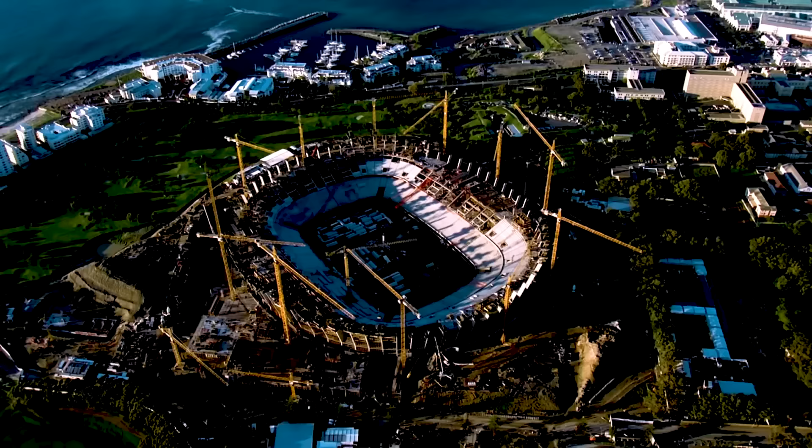The crane has been a tool of humanity for centuries. They're vital for the construction of everything from bridges spanning colossal rivers to skyscrapers that reach into the clouds. Modern structures would be impossible without them, and the same has applied throughout history.

Archaeological evidence suggests that the ancient Greeks invented cranes to help construct temples. It's believed a crane was used to build the Temple of Artemis in 530 BC. Obviously, they've evolved plenty since then.

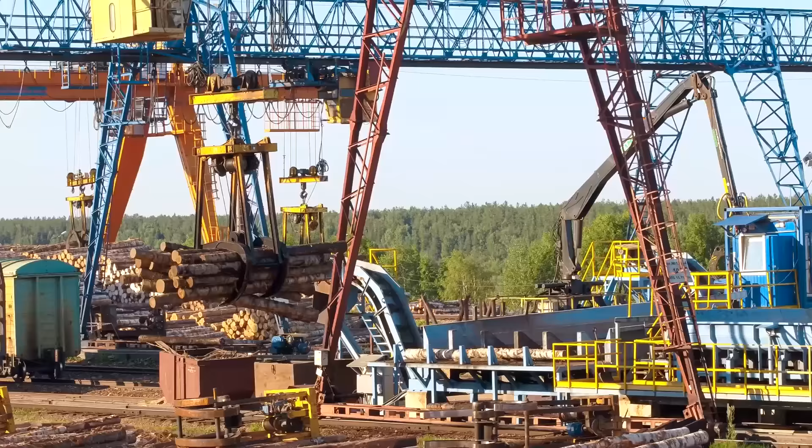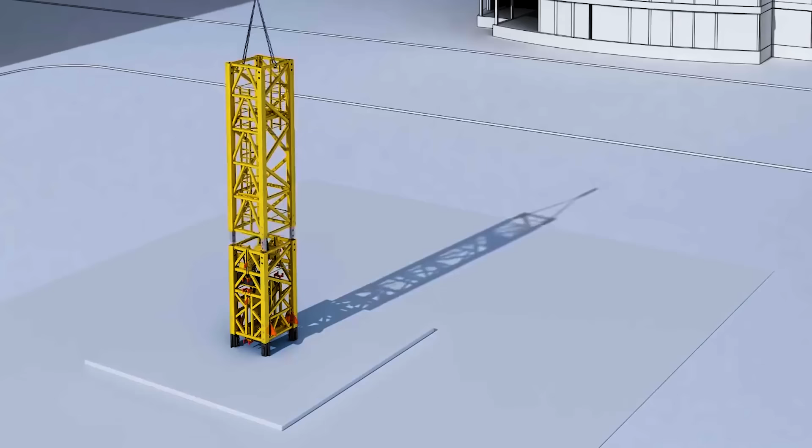However, prior to World War II, cranes were far less practical to use for a majority of projects. At the time, construction cranes were more akin to ship cranes and could only be used on large construction sites. They were fitted into concrete foundations, a process that normally took several days to complete, and were difficult to remove.

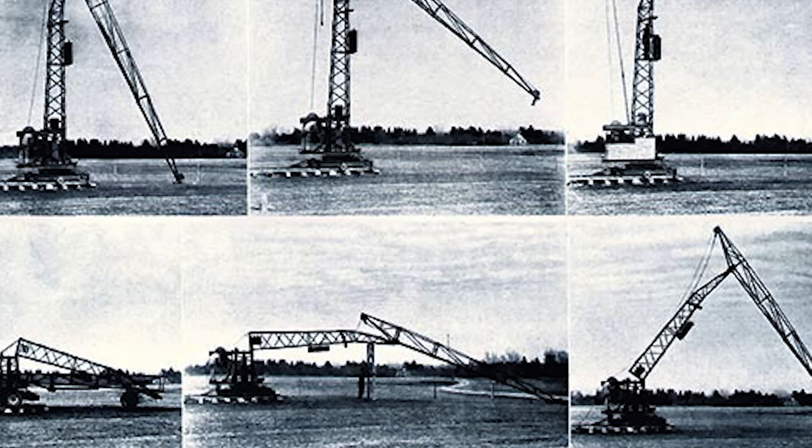With Germany in need of mass repair after the war, a master builder, Hans Liebherr, decided he needed to build a new type of crane that could be moved, used, and then easily moved again. In 1949, Liebherr invented the first mobile tower crane, the TK-10, which took 2 to 3 hours to assemble on the job site. This was a groundbreaking innovation in both the worlds of cranes and construction that not only accelerated the rebuilding of Germany, but laid the foundations for what is the Liebherr Group as it is known today.

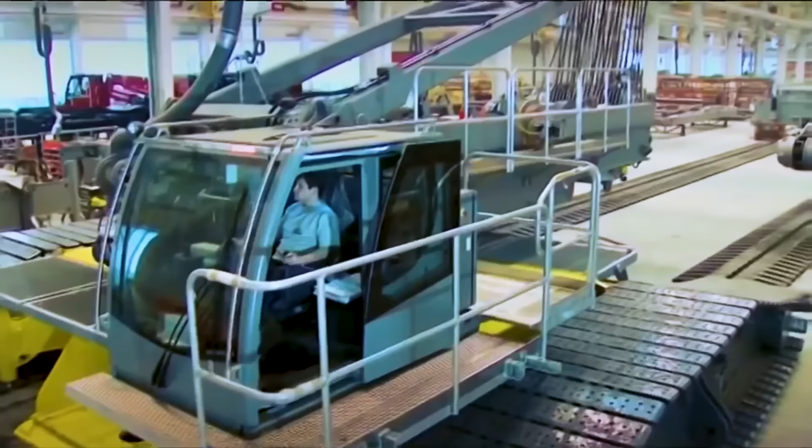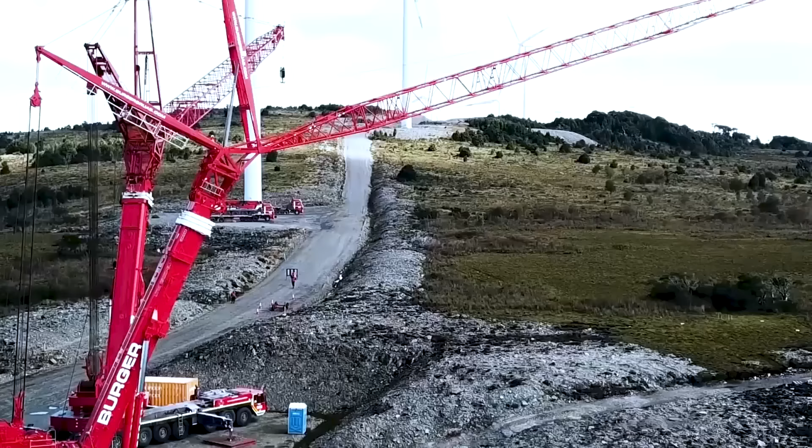We welcome you to this special documentary from Lord Gizmo, where today we'll cover the many impressive details of Liebherr's mobile cranes. Make sure to turn on captions if you want to see both metric and imperial units.

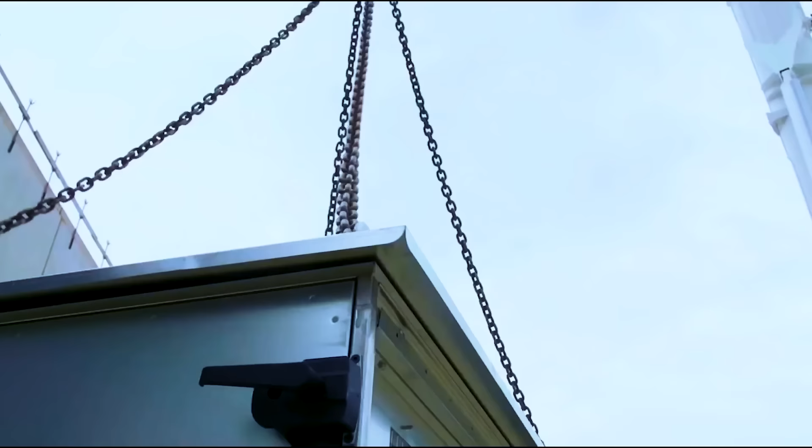The LTM 1300 is a 6-axle crane with a 78-meter telescopic boom that can be equipped with an extra lattice extension, providing a maximum hoist height of 188 meters. The crane can handle 300 tons of load within a radius of 136 meters. What sets this crane apart from traditional mobile cranes is its powertrain, which draws power from the same engine that is used to power the crane's boom.

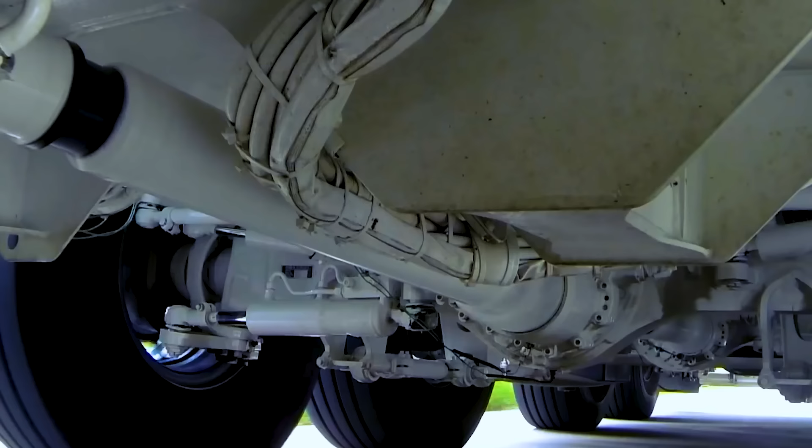Generally, a standard mobile crane is powered by 2 separate engines, one to propel the drivetrain and the other to operate the crane. However, mobile cranes from Liebherr come standard with one engine, used for both traveling and hoisting. The singular engine is connected with a distributor gearbox that runs the undercarriage when traveling and powers the pump drive when hoisting. This concept offers numerous benefits, including reduced vehicle weight and increased space in the superstructure.

It also improves balance, allowing for an increased load capacity or for a longer boom. Along with all that, having one less engine lowers overall cost, simplifies emissions systems compliance, and, most importantly, reduces maintenance complexity and costs.

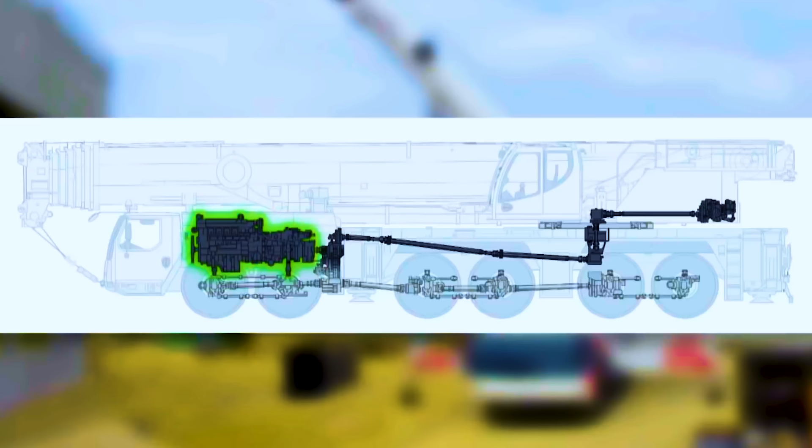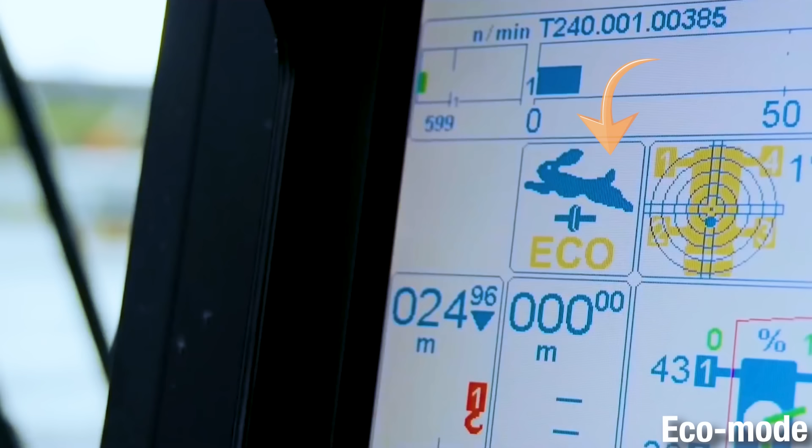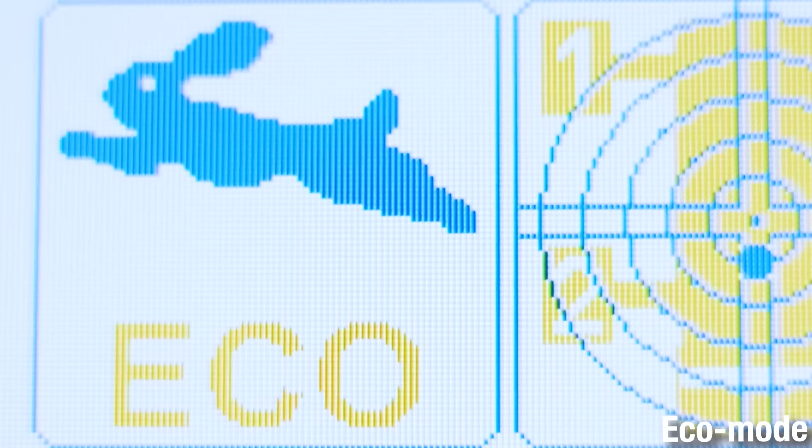To make their mobile cranes more efficient, modern Liebherr machines come with an eco mode. This system incorporates new technology that automatically senses when the crane is not in use and lowers fuel consumption. If the operator doesn't interact with the machine within a set time, the eco mode automatically initiates idle standby mode by disengaging the mechanical shaft from the pump drive.

The pump drive is automatically re-engaged whenever the operator decides to make an adjustment. The average crane idles more than 60% of the time during its operation, so this simple system is able to save a significant amount of fuel.

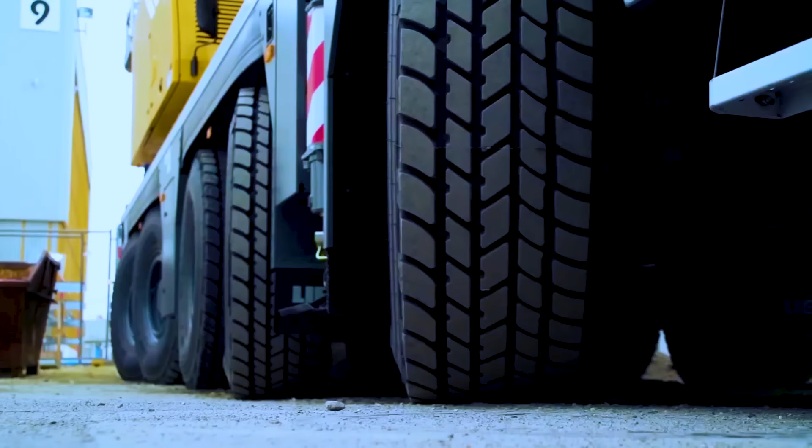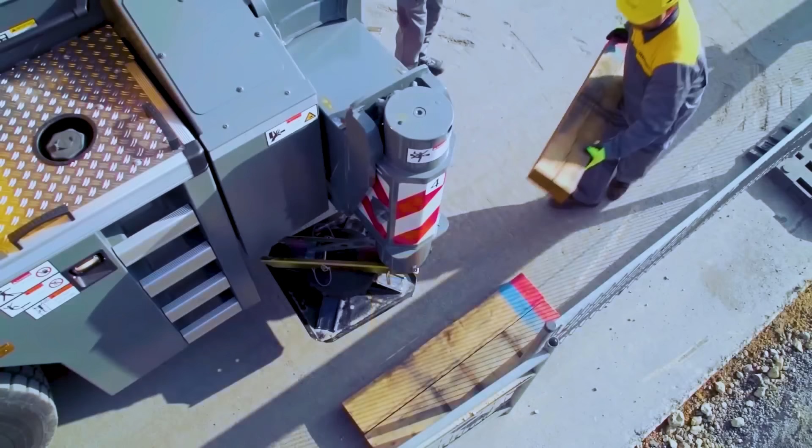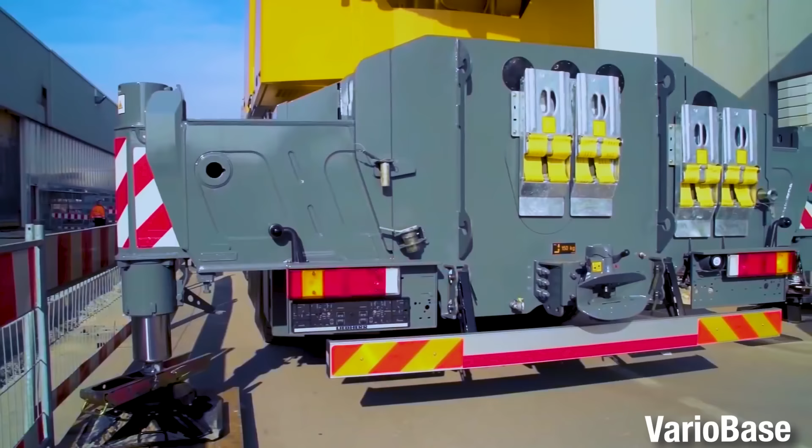If there is anything that is absolutely vital for any mobile crane, it is its stability. During crane operations, a mobile crane supports itself on an extendable steel base consisting of outriggers. The position of the outriggers determines how far the crane boom can be tilted. In tight spaces, however, the outriggers can't always be extended to their full length. Liebherr gets around this by using their VarioBase system, which allows the outriggers to be extended individually.

Liebherr demonstrated the benefits of VarioBase by using 2 mobile cranes, one with and one without their system. The provided constricted space only allowed for a support width of 4.4 meters, meaning each crane was only able to open its outriggers to half of their limit.

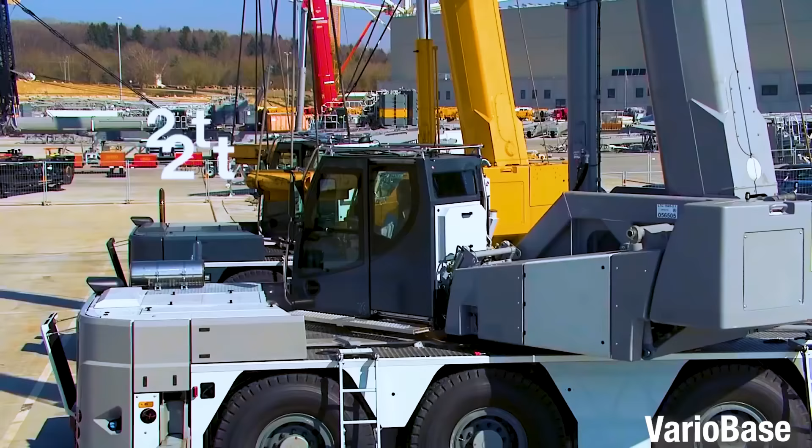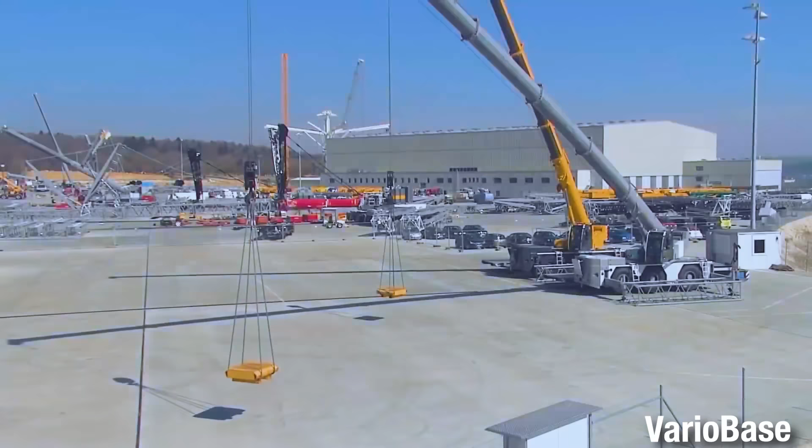However, the crane with VarioBase extended its outriggers by 0% on one side and 100% on the other. Consequently, it was able to attain a functional radius of 32 meters, 4.5 meters greater than with only 50% extension on all outriggers. In tight spaces, it's 12 meters longer than a standard crane.

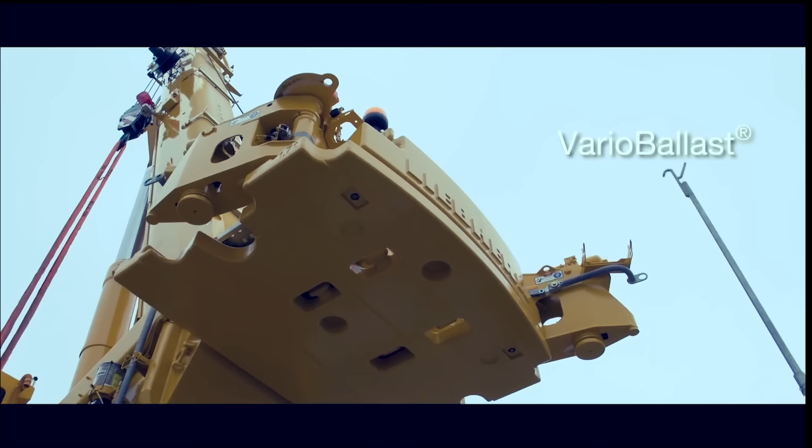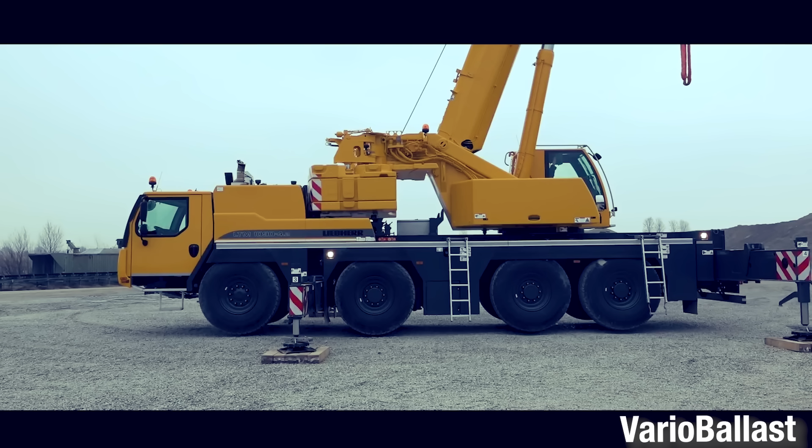There are other ways to improve the stability of a crane. Liebherr developed a system known as VarioBallast that, as the name would imply, shifts the ballast of a crane. Using a simple adjustment, the ballast radius can be changed quickly and easily, essentially moving it towards or away from the center of mass. In constricted working spaces, a narrow radius can prove to be most useful. On the other hand, a larger radius enables a crane to carry the same load to greater distances, or a heavier load outright.

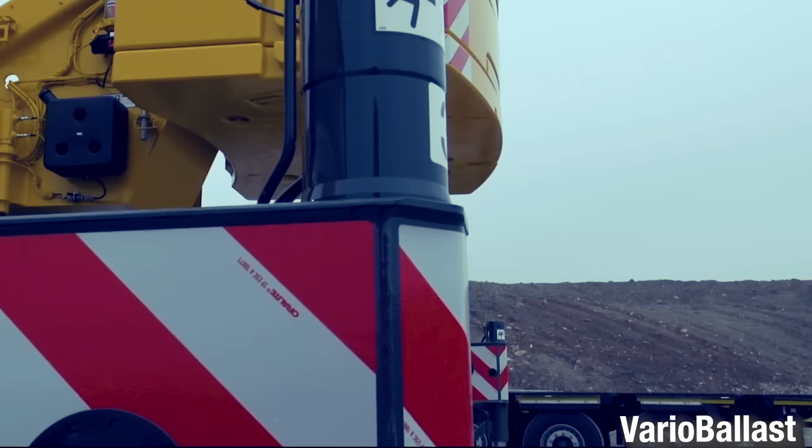The G-BKF is an armored mobile crane designed by Liebherr for the German army. It's certainly a great tool, but its use is not what we're focusing on. It features the same advanced steering system that Liebherr uses across all of their modern wheeled mobile cranes. It is designed to be used in 5 different modes. For instance, different modes can be selected for taking sharper turns, turning the front or back end, or moving diagonally without turning.

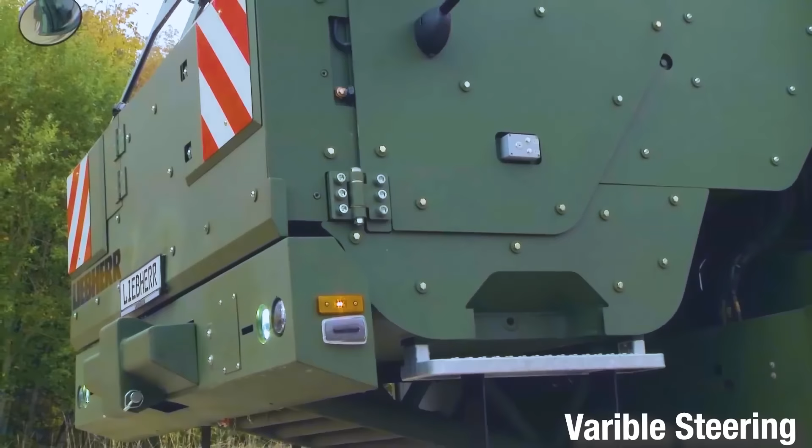Every wheel is equipped with adjustable height hydropneumatic suspension, which allows the operator to adjust for driving on slopes, reduced clearance height, or for increased ground clearance. The rear axles are actively steered by an electro-hydraulic system, while the front axles are steered mechanically directly from the steering wheel.

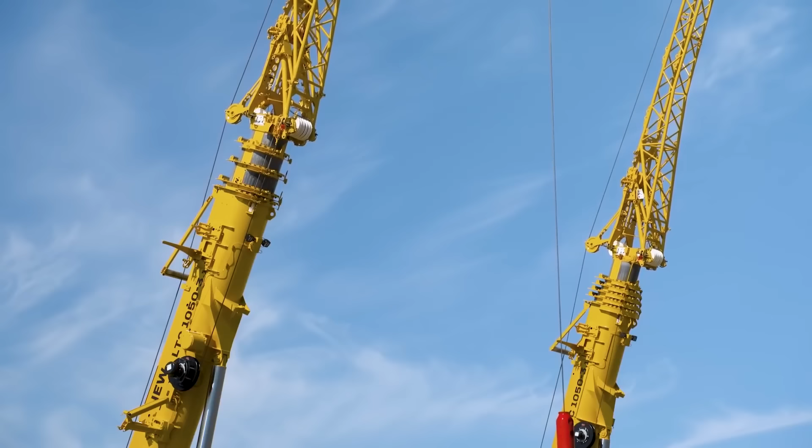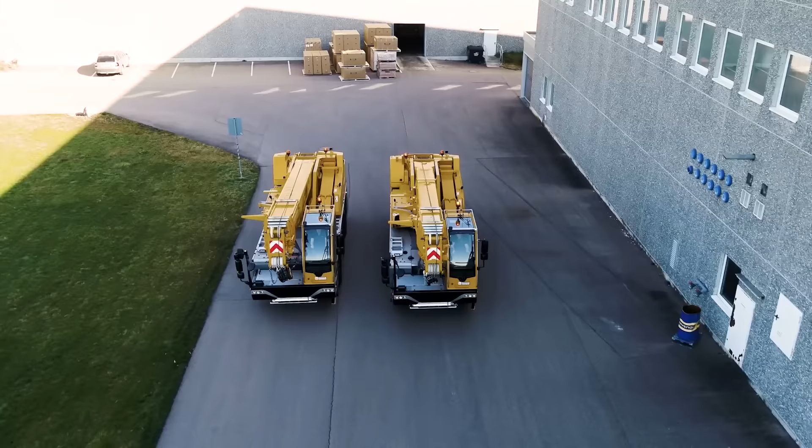The boom of any crane is obviously essential for it to perform its functions. Most mobile cranes come standard with a telescopic boom, which can be extended or retracted as needed. The boom's design determines its telescoping speed, load capacity, and lateral stability. Liebherr generally employs one of 2 basic types of boom for their mobile cranes. These are either a rope boom with a hydromechanical system or a telematic boom with a single-cylinder system.

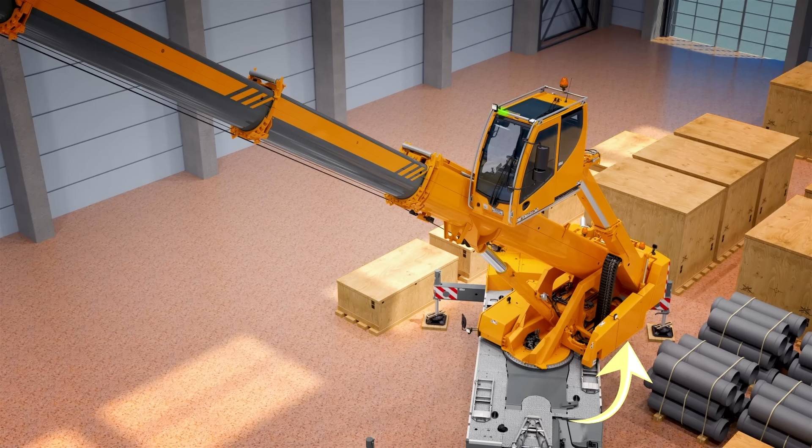A hydromechanical system is for any mobile crane whose telescopic boom consists of a pivot section and a maximum of 3 telescoping parts. The pivot section is the main frame of the boom that can be angled to change the height of the boom arm. The internal telescoping parts slide out of the pivot section using rope pull technology, which is based on a double-acting 2-stage hydraulic cylinder. Now, what does that actually mean?

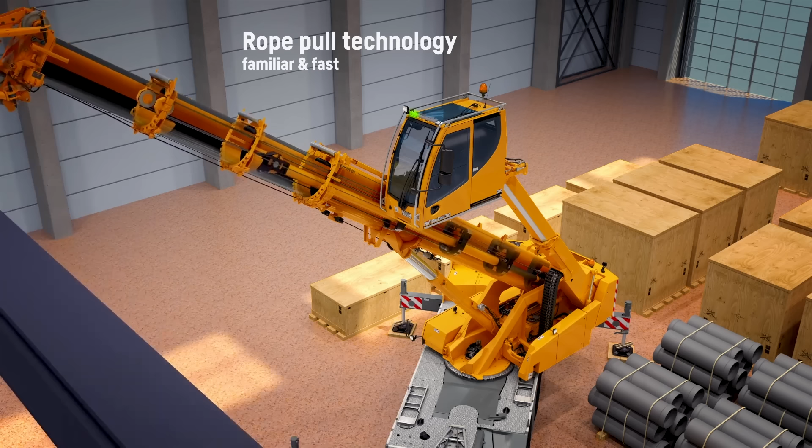Put very simply, a double-acting cylinder has a piston with 2-way hydraulic power so that it can be pushed or pulled. All of the telescopic sections move simultaneously. This enables the crane to extend and retract the telescoping parts faster than a single hydraulic cylinder. This boom type was designed for usage at low heights, such as between buildings.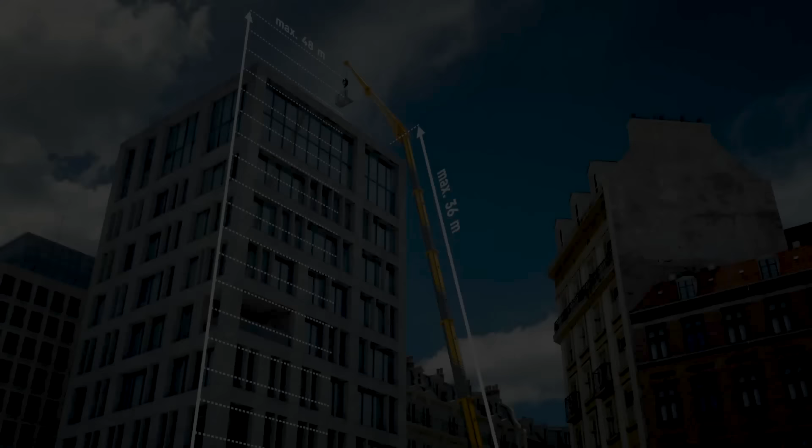A telematic boom, on the other hand, has an automated telescoping mechanism that relies solely on a single-cylinder extension system. It also includes an internal locking system, which locks each telescoping section one after the other. In other words, each section can only extend when the section before it reaches its maximum length. The telematic boom has been in use since the 1990s. This decades-long experience is why most mobile cranes are fitted with it, rather than other modern telescoping systems. This technology is still unbeatable when it comes to lifting and telescoping heavy loads.

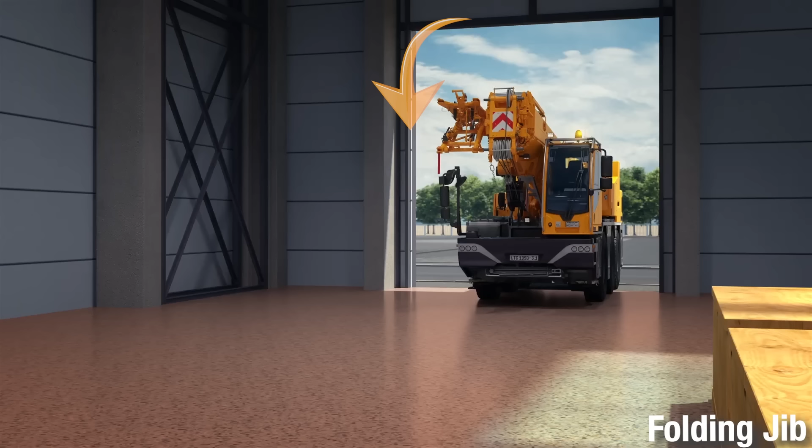Crane manufacturers also develop extensions for mobile cranes to meet job requirements, known as jibs. This includes the folding jib and the fixed jib. A folding jib is an extension that can be, as the name would imply, folded up and doesn't need to be taken off after use. On the other hand, a fixed jib is brought to the worksite separately and mounted thereafter. Such jib extensions provide exceptionally high hoist heights and load capacities when compared to folding jibs.

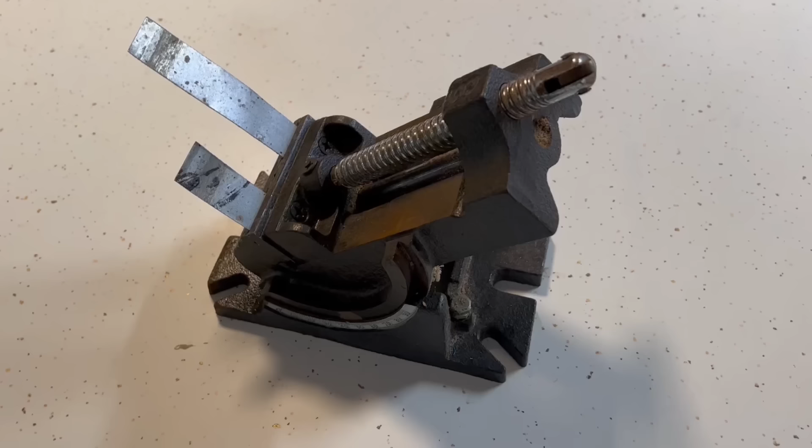The higher a boom goes, the harder it becomes to keep stable laterally. To put it simply, a heavy weight hanging from a long boom can cause the boom to bend. Imagine how a thin metal strip deforms when subjected to a force, and how a longer strip will visibly bend more than a shorter strip.

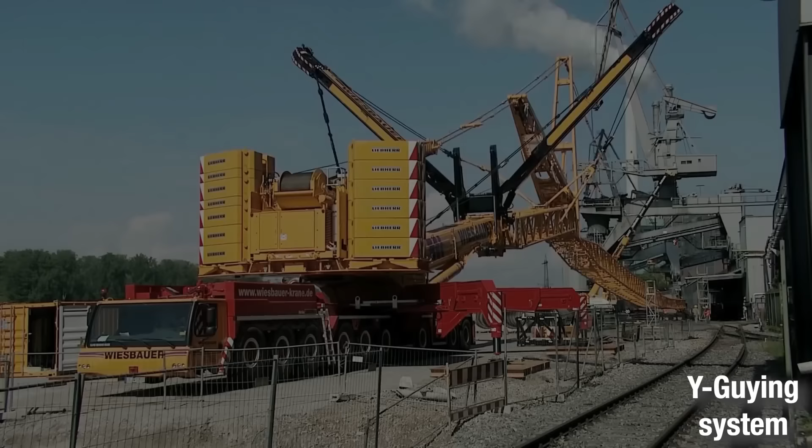A unique solution has been developed to counter this problem: the Y-guying system. Two ropes on both sides of the boom, pulling in tension to identical lengths. This keeps the boom straight and gives it a higher load capacity. It's definitely a complicated system though, which is why Liebherr only uses it with cranes that already have a load capacity of 350 tons or more.

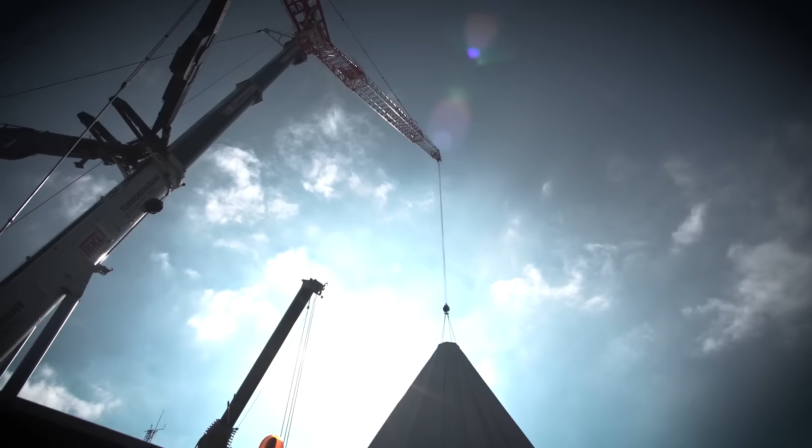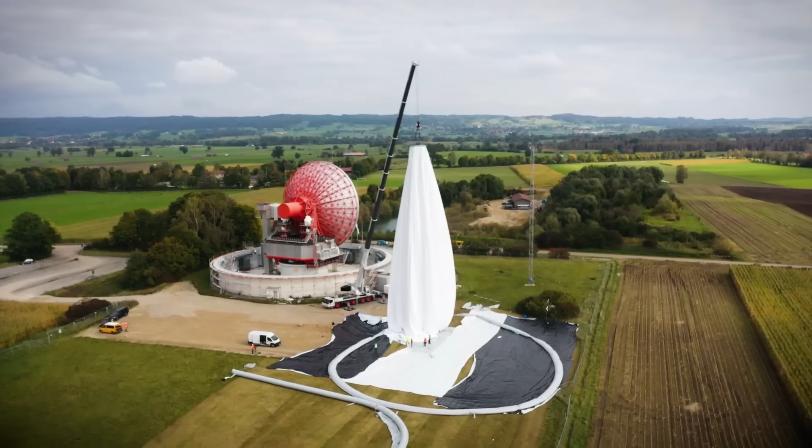One such crane is the LTM 1650, an 8-axle mobile crane with a 700-ton maximum load capacity. Using the Y-guying system, it was able to install a protective cover on the Raisting Radome, a satellite Earth station located in Bavaria. The total length of the crane's telescopic boom is 80 meters, on which a 56-meter luffing jib was installed. Strong blowing wind was the real challenge, as the cover was 50 meters in diameter, making it like a sail to the wind.

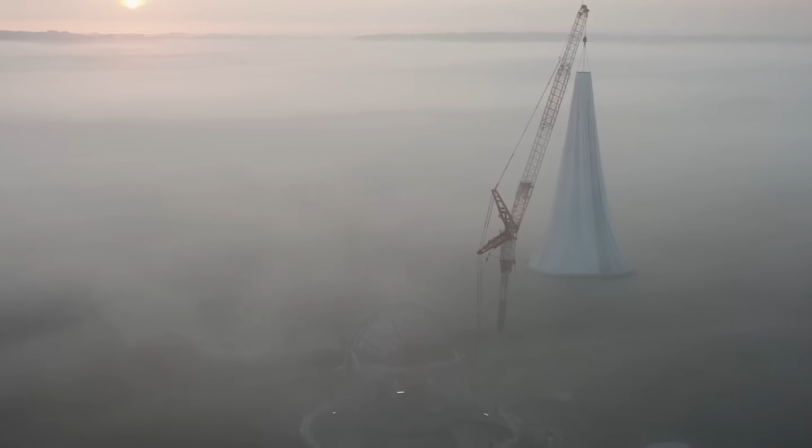The team calculated that the mobile crane would be able to draw over the cover with a wind speed of up to 1.5 meters per second. That's about 3.3 miles per hour. The Y-guying system kept this delivery firm, even when the load was 100 meters high from the ground. This Earth station, which once communicated with Apollo 11 to complete the moon mission, is now once again completely functional.

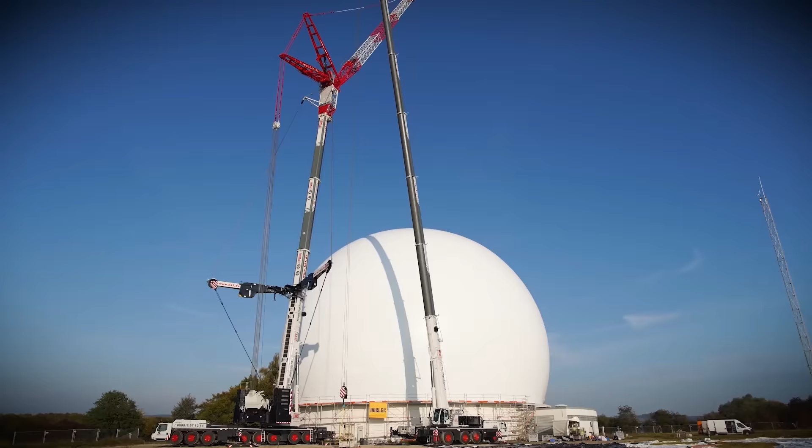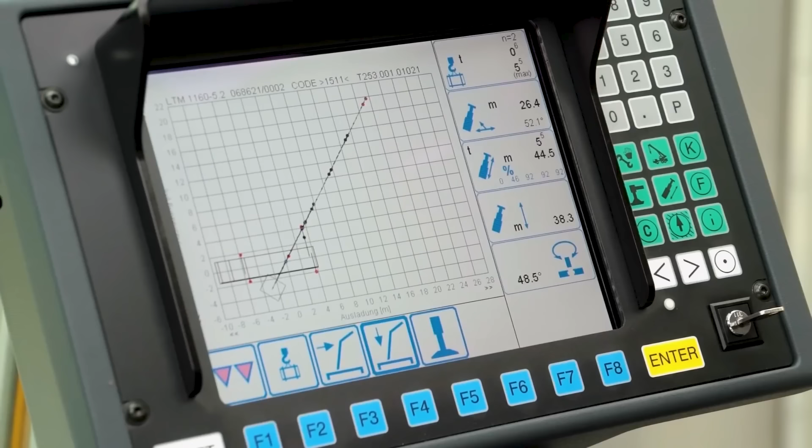The modern mobile crane comes standard with an intuitive control system. These use a variety of different sensors, alongside monitoring and control modules. One such example is Liebherr's LICCON system. Such a control system helps operators deploy the mobile crane more quickly. Using a Bluetooth remote control, operations setup can be completed quickly and safely. It employs advanced software in order to guide the operator in real time. A taste of the future, a VR-supported planner can be used in order to find issues and solutions in advance of the project.

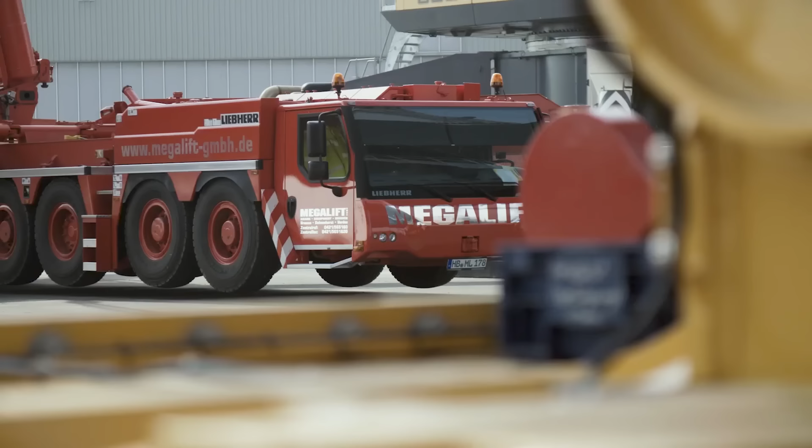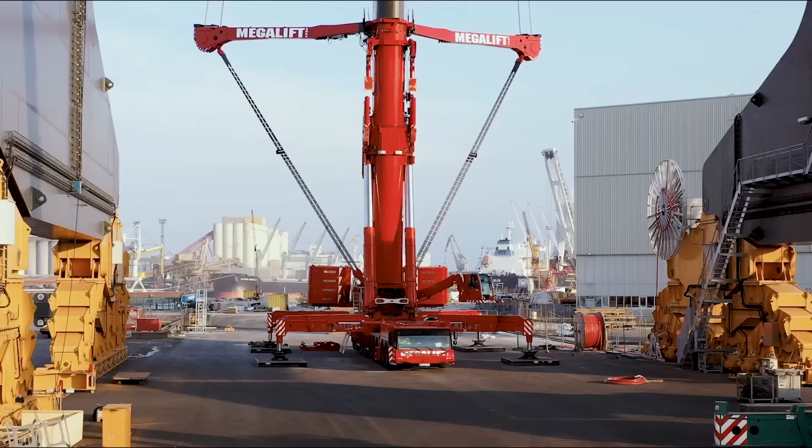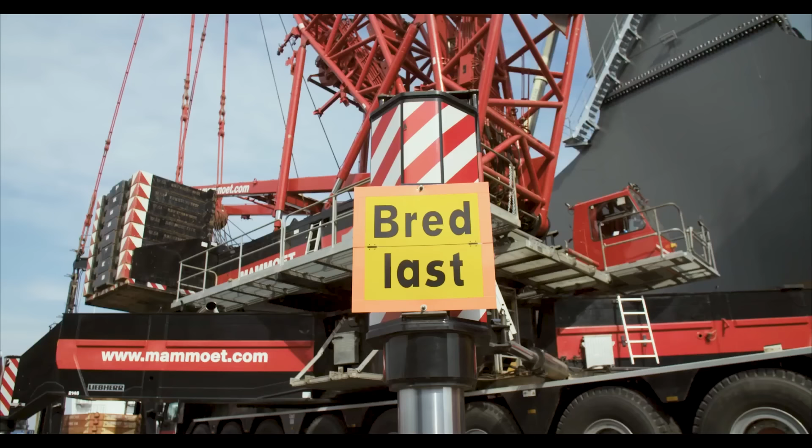The LTM 11200-9.1 is the largest mobile crane in its fleet. It comes standard with a 100-meter telescopic arm, offering a maximum load capacity of 1,200 tons and a maximum hoisting height of 188 meters. In addition to that, its boom can be extended using jib extensions or a Y-guying system, which is considered an ideal choice for the construction of wind towers. Here, this mighty machine, in collaboration with the impressive LG 1750, is raising a 160-ton top section for the mast.

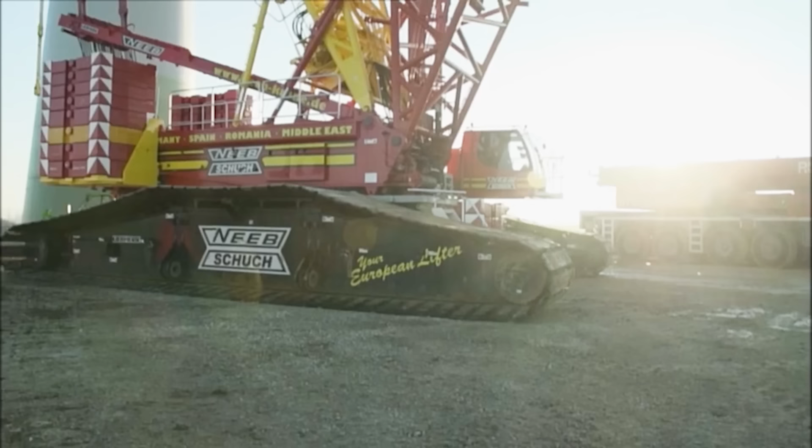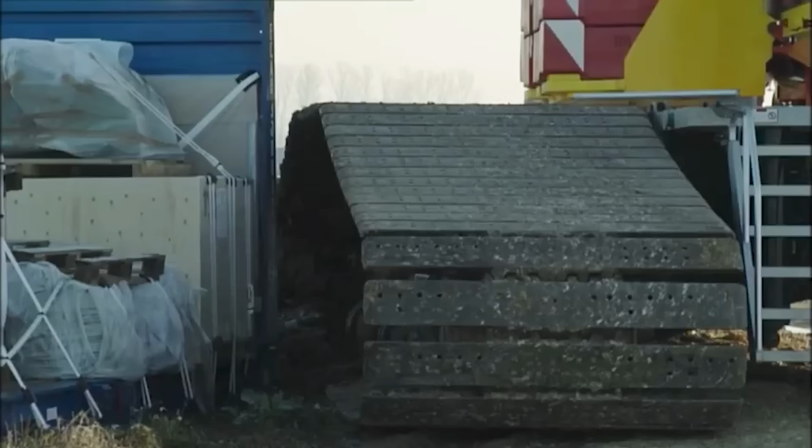Compared to a standard mobile crane, a crawler crane has the ability to move itself around the worksite, but it does so using a crawling undercarriage rather than wheels. This gives crawler cranes an advantage around the worksite by limiting the need for outriggers. Sometimes crawler cranes are steered while carrying a load. As compared to mobile cranes, a crawler crane can haul more loads and provides extra flexibility, but that doesn't mean this type of crane can smoothly deal with any job site situation.

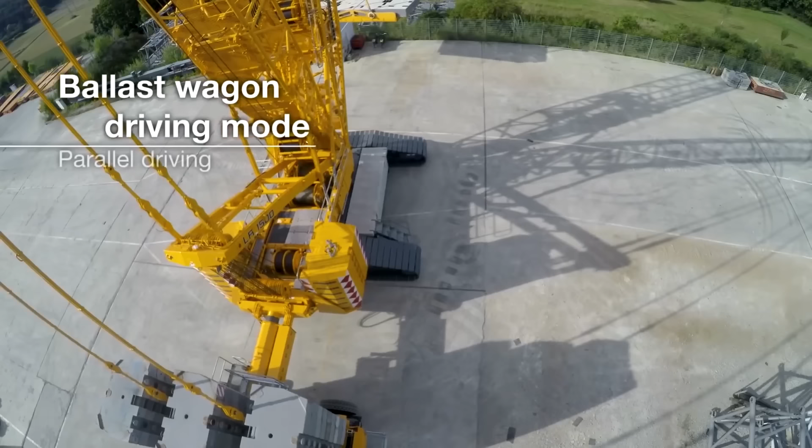For one, crawler cranes are unable to move along roads. Their tracks would cause damage to any road surface, particularly when turning. Thus, they generally have to be transported to a job site via trailer. Along with this, as with any machine, the working area under a crawler's track can only absorb a limited amount of pressure. Tracks are great for spreading out pressure. However, the ground around things like ledges or above underground pits can only take so much force. Exceeding this can cause subsidence, and as a result, the machine could overturn.

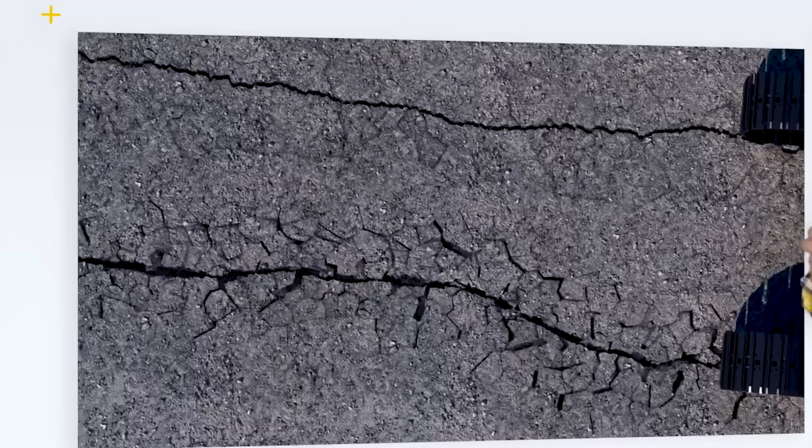In order to cope with this problem, a ground pressure visualization system is installed in crawler cranes. This system constantly measures the ground pressure and the exact position of all moving parts. On the control monitor, the machine's center of gravity and ground pressure are displayed so that the operator can avoid potentially hazardous situations.

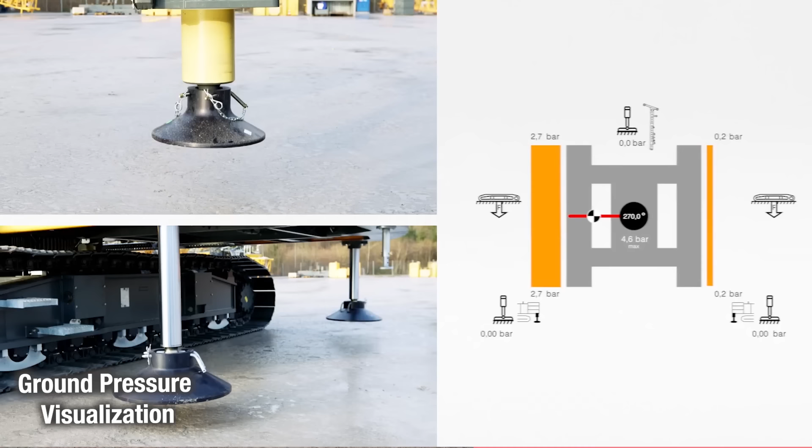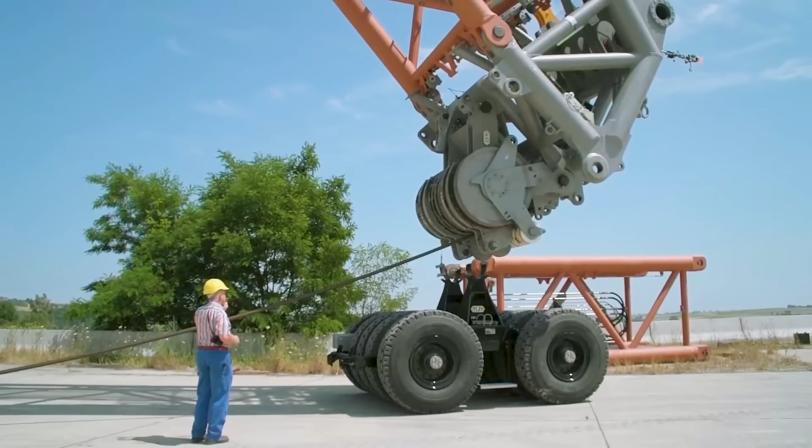Unlike mobile cranes with telescopic booms, a crawler crane is typically mounted with a luffing jib. It has a lattice jib that can be raised and lowered, a motion known as luffing, which offers greater adaptability and lifting capacity. Due to the reduced slewing radius, it is particularly useful for work in congested areas. The LR13000, with a 120-meter main boom and a 126-meter luffing jib, is the tallest crane in the world, offering an overall height of 246 meters.

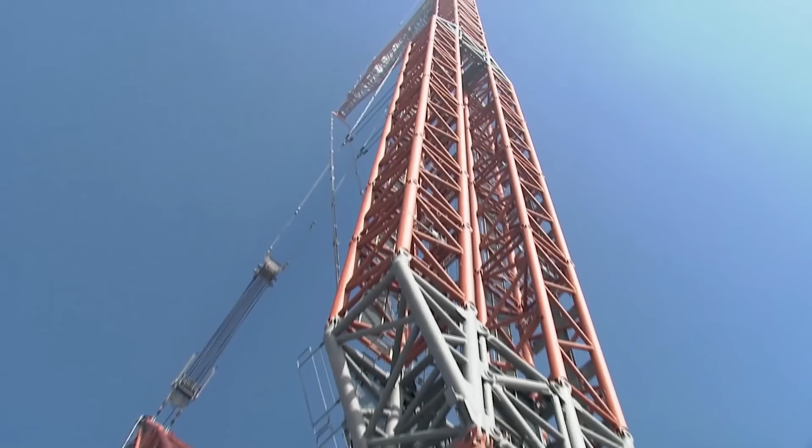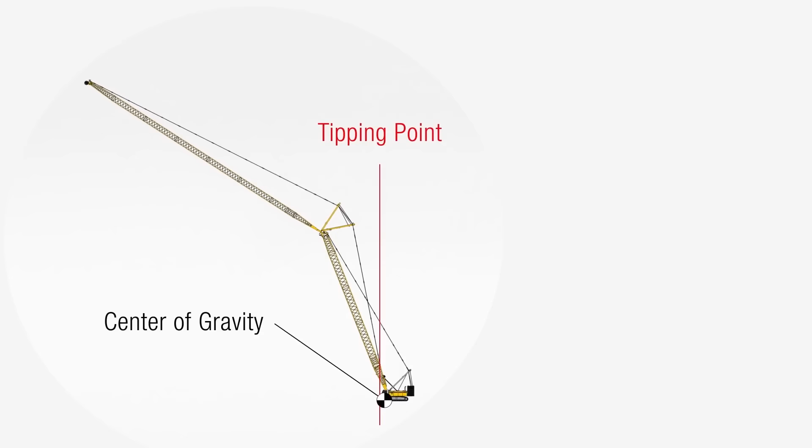Erecting such a long, heavy boom is a challenge in and of itself, and keeping it straight is yet another. The higher the boom stands, the harder it becomes to keep it upright, as the boom becomes exposed to increasingly stronger winds. This can lead to tipping, which is a problem that occurs when the crane's center of gravity is not above the tracks or outriggers. This is the reason wind sensors are mounted on the top of the boom and jib. These provide real-time feedback to the system. If the situation becomes severe enough, the inbuilt AI stops the operation and brings the boom back to a safe position.

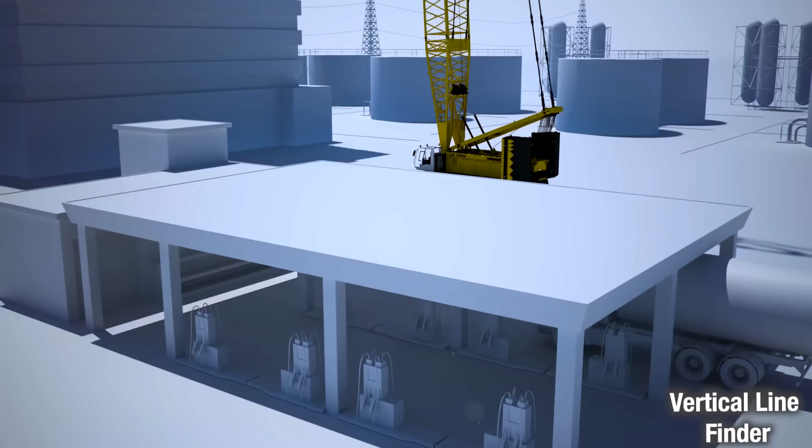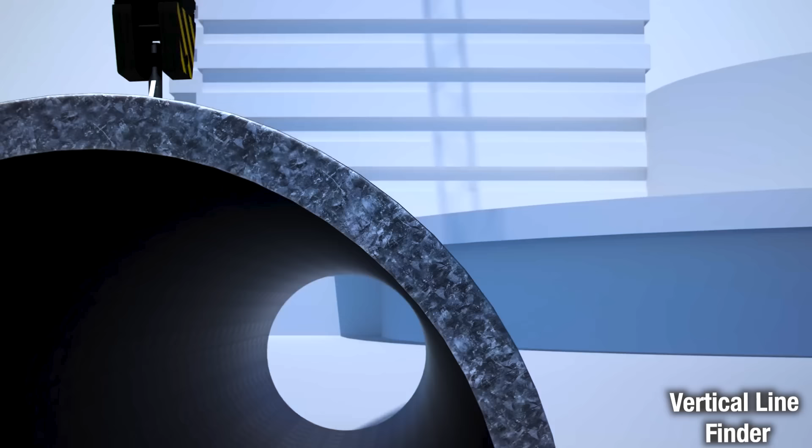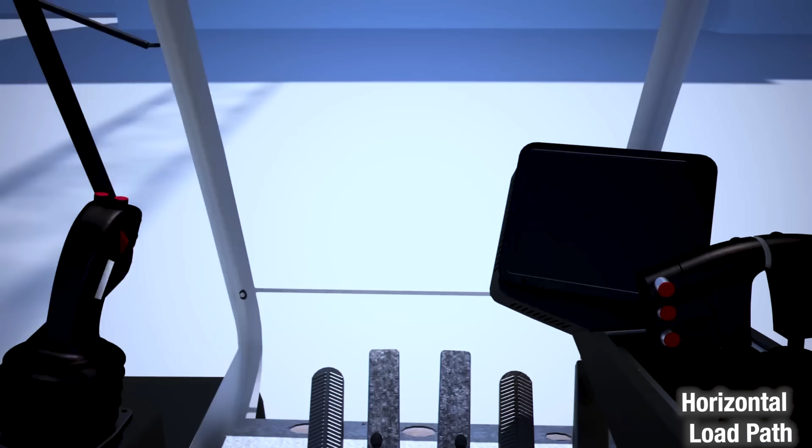It is also critical to keep the load vertically and horizontally aligned. To prevent swaying, the operator has to ensure that the boom is aligned directly above the load, and must keep the rope tensioned before lifting. Moving the load horizontally while keeping it level is the real test for operators. To make this risky task less challenging, Liebherr developed a system to automate much of this work. The crane automatically senses the tension of the rope and positions the crane's boom above the load. This prevents swaying of the load when first being lifted. The control unit then automatically adjusts the hoist gear for steady horizontal movement of the hook and load. This results in quick and easy lifting operations.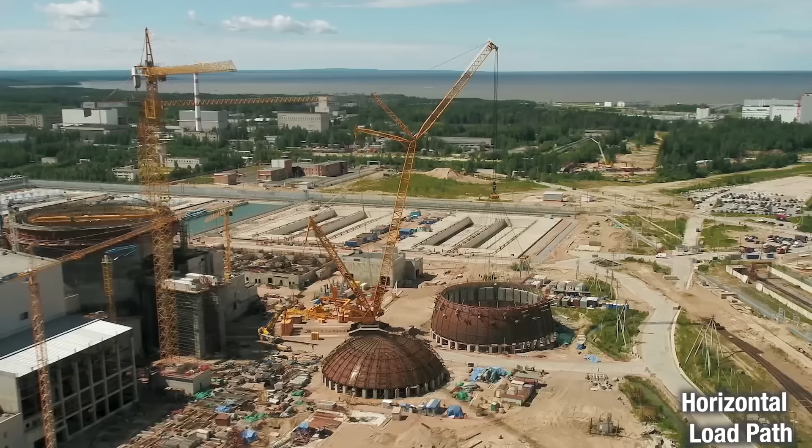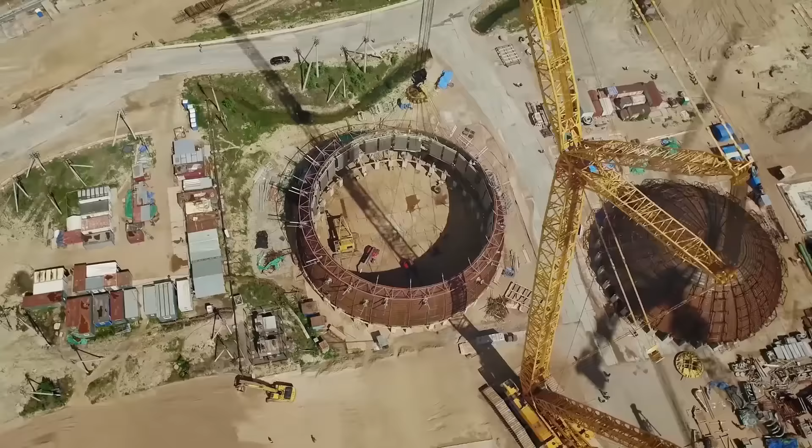The LR11350 is a crawler crane with a maximum lifting capacity of 1,350 tons, a hoisting height of 220 meters, and a boom radius of 164 meters. This crane was able to lift the protective shell of one of the reactors at the Leningrad nuclear power plant. The dome was designed to prevent the emission of harmful substances into the atmosphere in the event of reactor failure, and had a total weight of 300 tons.

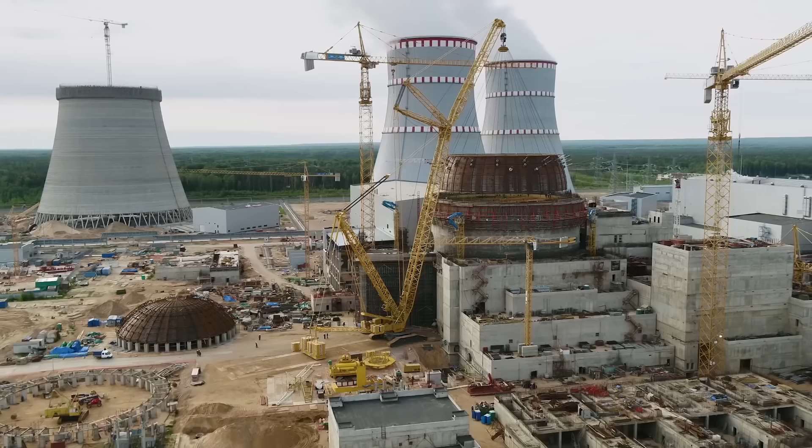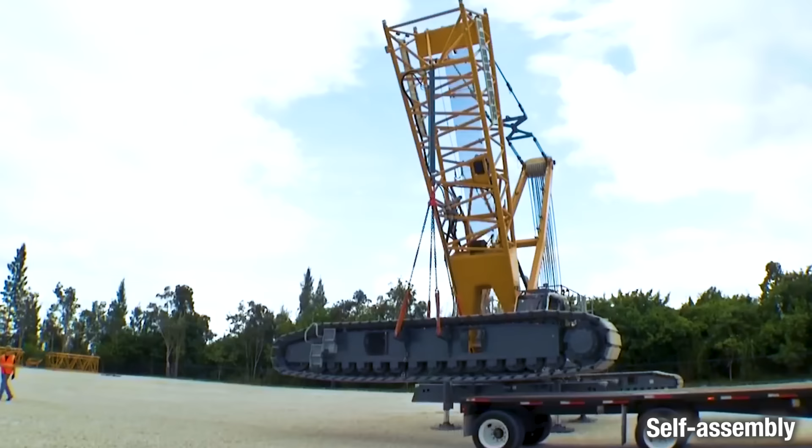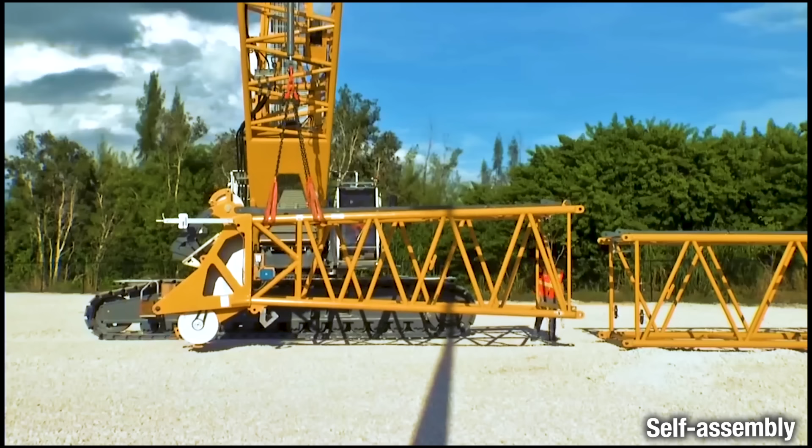Transporting such a massive crane to the job site and assembling it is no easy task. Liebherr designs each major component of the crane with transport standards in mind. In addition, Liebherr creates a variety of crawler cranes that come standard with the ability to self-assemble. The basic crane unit can easily stand on its outriggers and install different parts of the crane, including the crawling undercarriage, counterweight units, and winches. Each section of a lattice boom typically features connection locks that need to be aligned and locked. To lift the boom, its first section is connected to the A-frame. Then, the sections of the boom are connected. After that, counterweights are mounted. The crane is then positioned in front of and connected to the main boom.

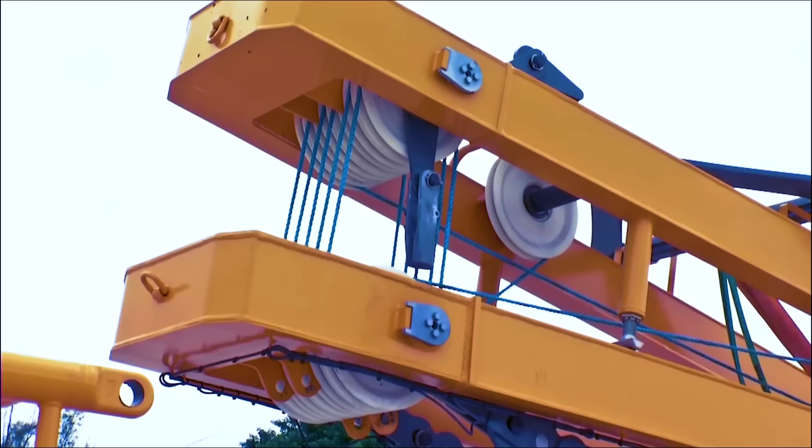A typical crane has two winches. One winch operates the lift cable while the other controls the tilt of the boom. An auxiliary winch is required to operate the luffing movement for the luffing boom. The rope of the main winch that lifts the load is led to the end of the boom. Likewise, all winches are connected to their relevant parts. Finally, wind sensors are attached, and the boom is erected by pulling the wire rope.

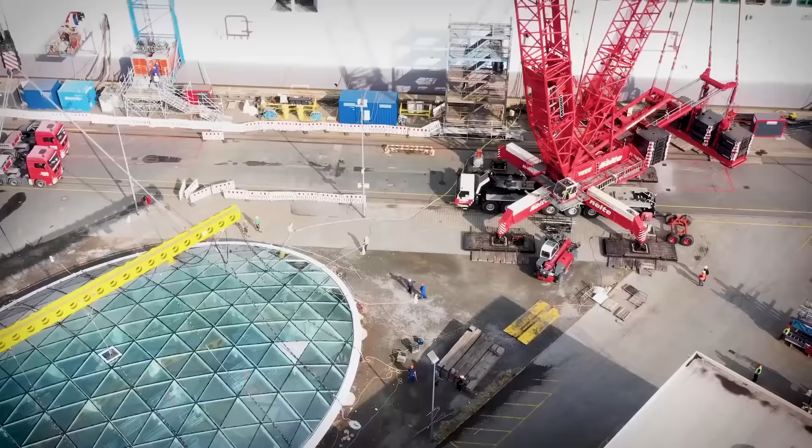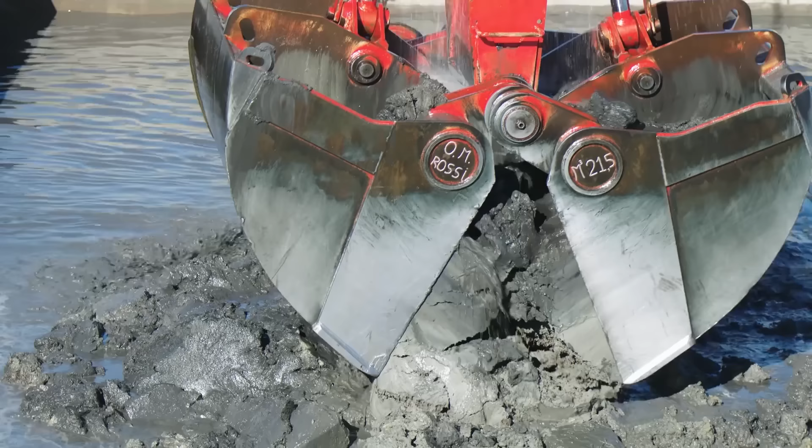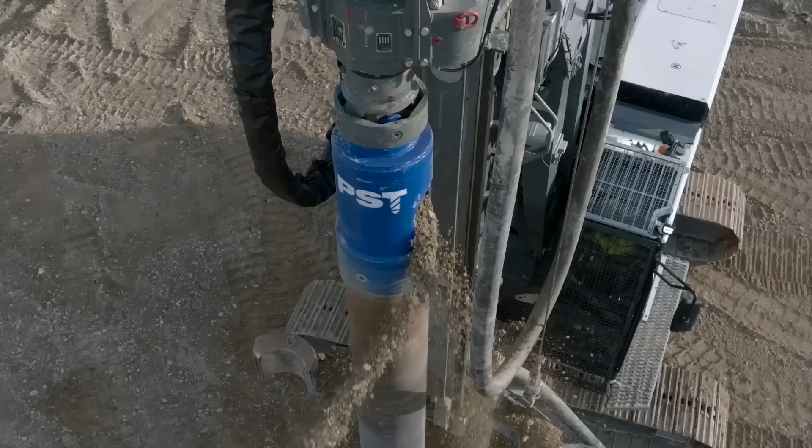Though cranes are generally known for their use during construction for lifting heavy objects, they do have a number of other uses. For instance, they can be used for a variety of earth-moving tasks, such as piling foundations, dredging canals, and grabbing dry bulk. These types of cranes are known as duty cycle crawler cranes. These duty cycle cranes are capable of being outfitted with slurry wall grabs or hydro mills. They function as a piling rig with fixed and swinging leaders. They become a drilling rig when a pile grab and casing oscillator are attached. The duty cycle cranes are able to compact soil using tamper weights. These can also be converted into a dragline excavator for a variety of different applications.

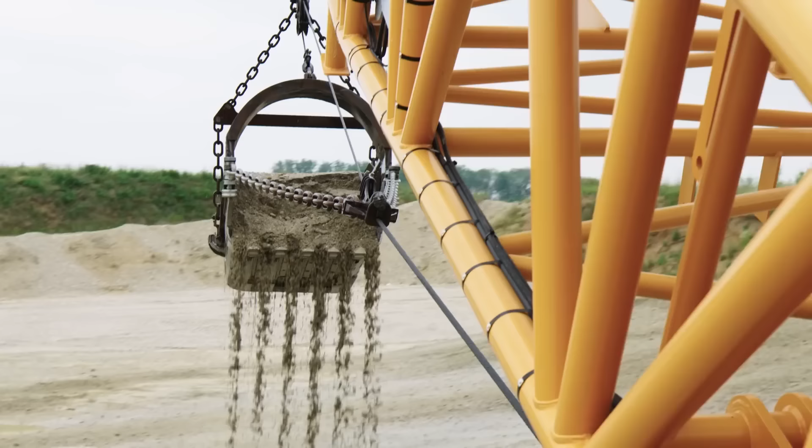Mobile cranes have a long history of helping keep the construction of countless projects practical and safe, with Liebherr always staying at the forefront. We hope that all of you enjoyed this special documentary from Lord Gizmo on Liebherr's involvement in the world of mobile cranes, and that you got to learn something about the work they do.